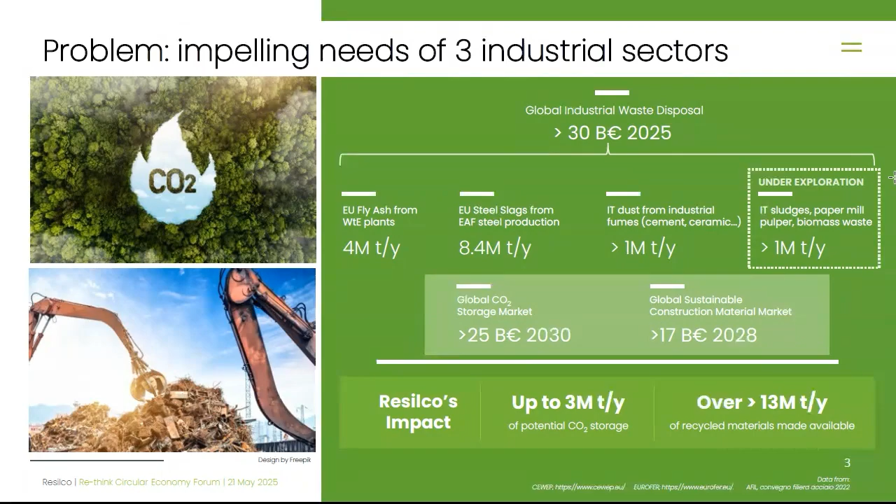How big is the problem? We are talking about a quite large problem, since there are several billions of euros spent on disposal costs for our industries. We have several billions on new construction materials, and then the CO2 market is involved as well. So it's a big market generating a lot of economic and environmental problems in Europe, but not only. So we are quite ambitious. We are working in Italy, but we are expanding to Europe, and the idea is to arrive at more than 2.3 or 3 million tons of CO2 storage per year.

What we offer is a solution. We found that we have to generate a new supply chain. As for everybody working in a circular economy, you have to create your own markets. It is difficult to introduce a new material. We are at the end of the life of the waste from these industries and at the beginning of the other industries. We transform the waste into a raw material. So you have to be in a place where nobody was before. This is an opportunity, but also a difficulty. And the permitting and all of the regulations are quite tough.

We work with the stainless steel industry, waste-to-energy plants, the ceramic industry, and the cement industry. We took the waste, treated it and tested it with the final users, the building sector and road sector. So everywhere you need calcium carbonate or derivatives, we can apply.

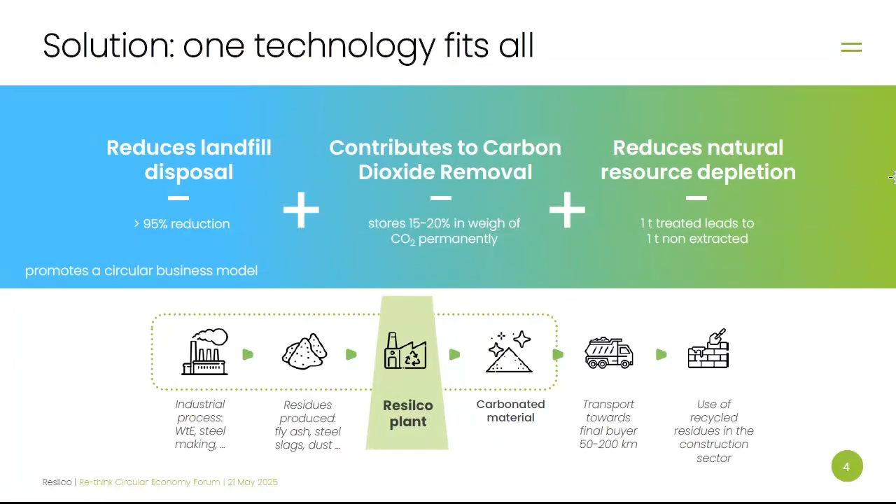What we do is quite simple. We do what happens in nature, but which takes hundreds or thousands of years. We carbonate the molecules that get carbonated in nature, but we do it in minutes. And we do it quite efficiently since we use mechanical forces, without high pressure or high temperature. So we are quite fast and efficient in making this carbonation.

The carbonation has different values. One is storing the CO2, because we can store it permanently inside the material. But we are also encapsulating the hazardous problem. Most of those materials are hazardous waste because they have heavy metals or elements that can harm the environment and humans. With the carbonates, we encapsulate all of this material in a shell, and this shell is stable up to at least 800 degrees. So we can pass all of the environmental controls and the material is safe to be used in construction.

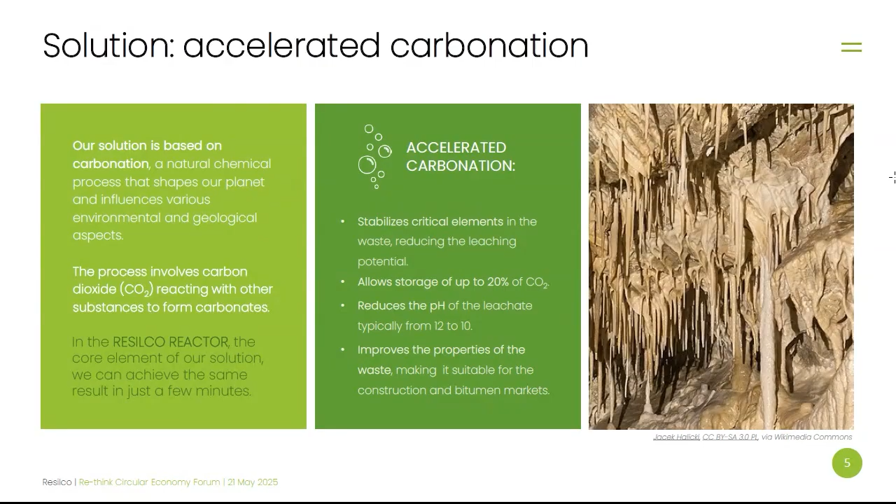Quite simple. We mix with water, we mix with CO2, we use our patented reactor, and in a few minutes we have a sludge containing the new material. We separate the water and the solid. The solid goes to concrete manufacturers, stone manufacturers, or any road manufacturer, for example.

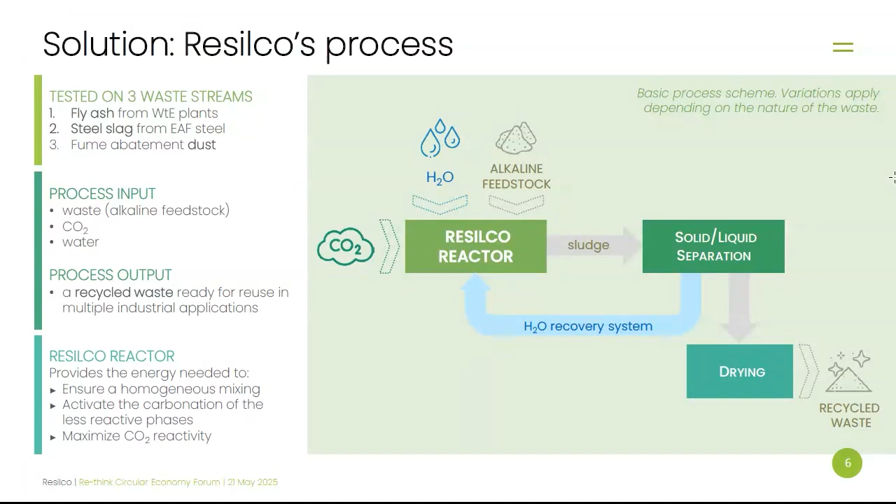And the water gets fully recovered, because we use a lot of water. So part of the 3 years of development was spent investing in how to recover the water to be more sustainable. So quite a young company, but with more than 5 patents, Italian and international. The material has been tested with the final users, universities, and has been validated.

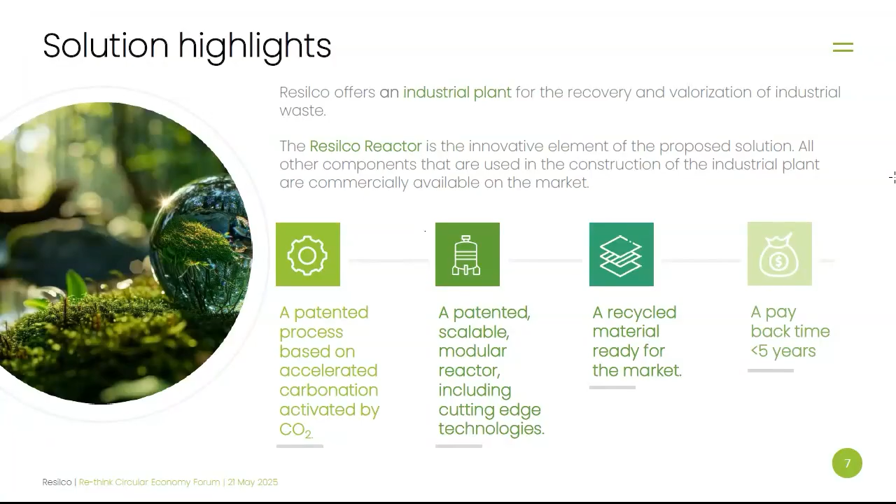As I said at the very beginning, environmental problems have to find a solution that is economically interesting for the company. So the return on investment for our plants is typically below 5 years. So it makes it interesting also for our customers.

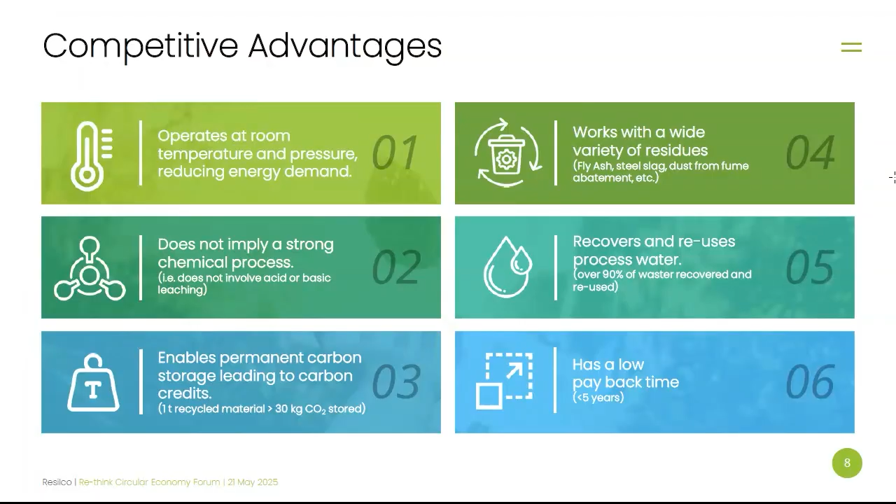We are not alone. We have companies in UK, we have companies in Switzerland making carbonation, but we are the only ones working at room temperature, room pressure. We don't use any other chemistry but the CO2. And we can use the very same reactor for a large variety of materials. So this makes you more comfortable with the market. We recover the water, and then we generate high quality carbon credits. So basically, you can also have some revenues from that.

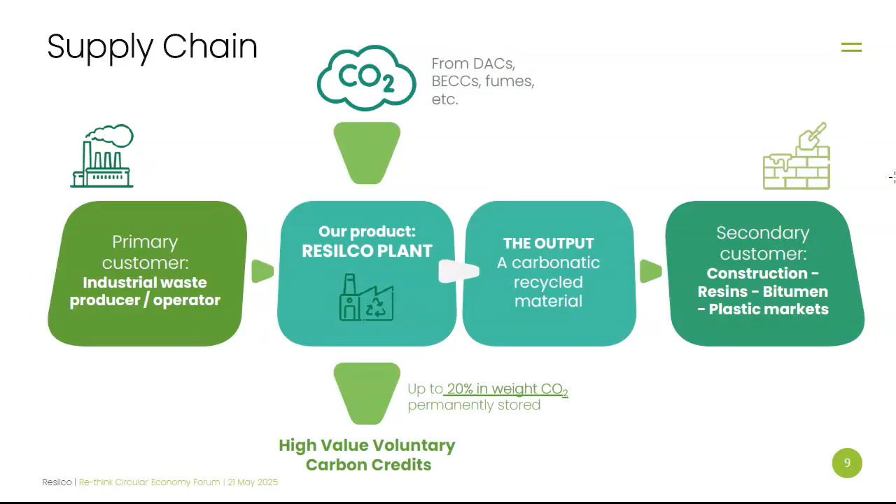So this is the supply chain we are creating for our customers. So we take the waste. We have partners delivering the CO2 from direct air capture, from biogenic sources, and then we sell the material at the end. And we take care of everything for our customers. So we sell the plant, but we also manage the plant for them, because most of our customers are not familiar with construction materials. So they are asking for a solution which is turnkey. So this is what we do.

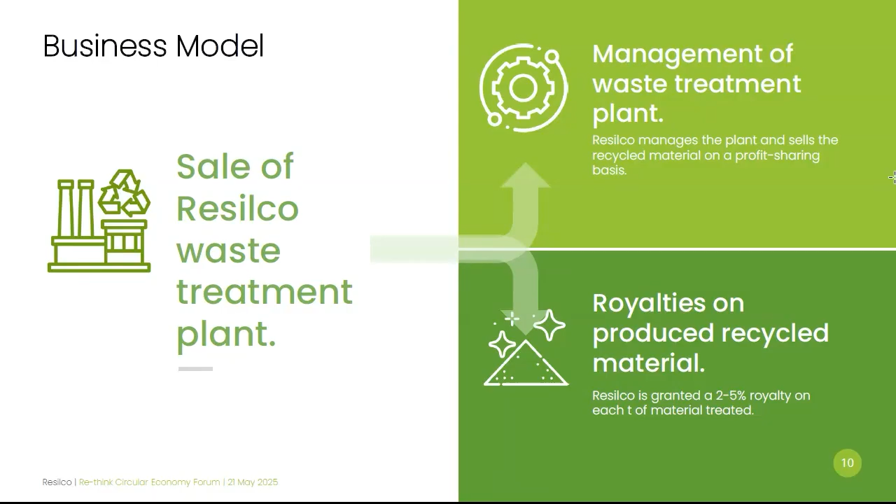And then, creating the supply chain, we govern the final market for our products, so we can maximize the value. Typically, we choose customers that are geographically close to the waste generator, so we don't have the impact of the transport, but also we are looking for the highest value we can obtain for them. So certain materials can be sold as a cement substitution, and this is the highest value we can have. Some others, like a pozzolanic. So we try to match the perfect material with the perfect value.

Not me, the team that works with me, but we are already working with 100% of the waste to energy plants in Italy. So from A2A, which is actually one of our partners and is a shareholder of the company, but we work also with more than 60% of the stainless steel manufacturers in Italy. We validate the material again with the final users, making concrete, making all of the different derivatives for the road industry or for the building industry.

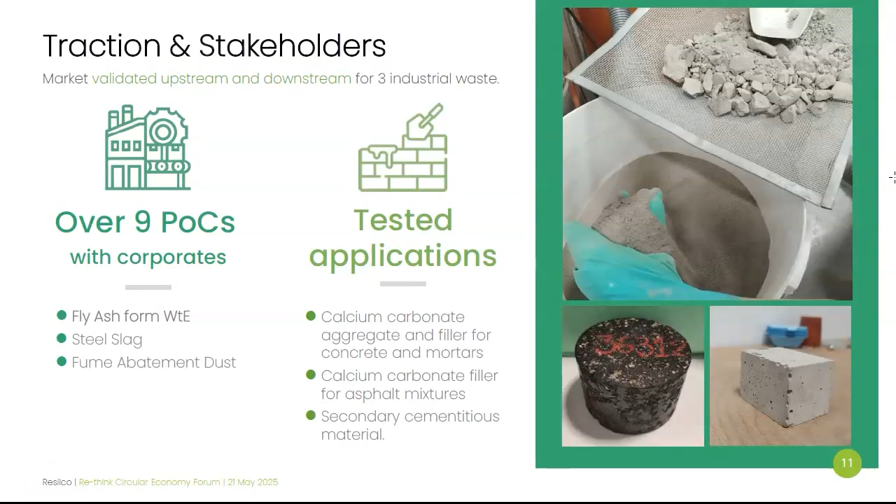Where we are now, we are validating the environmental permitting of the material and the environmental permitting of our plant. So we have a small laboratory plant capable of doing 500 tons per year, close to Milan. It's just 10 kilometers from here. And we are now doing the permitting for the first small industrial scale plant, up to 5,000 tons per year. Again, it's 5 kilometers away, and it will be operational by the end of the year.

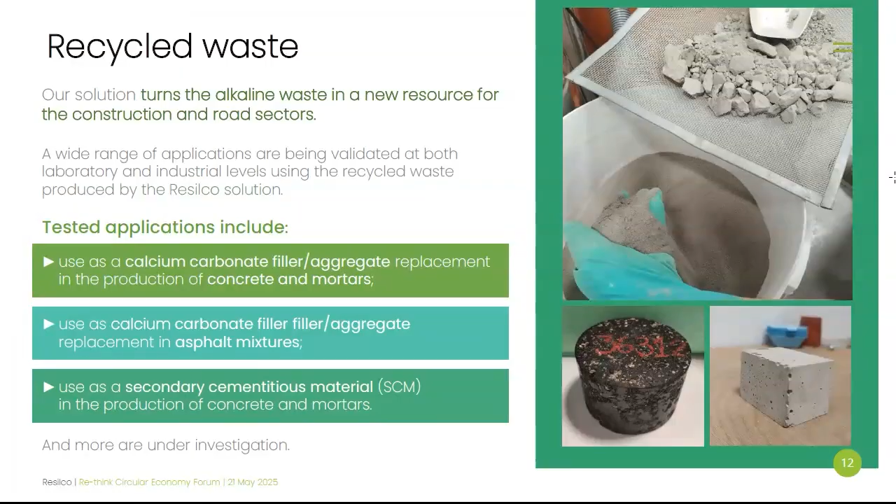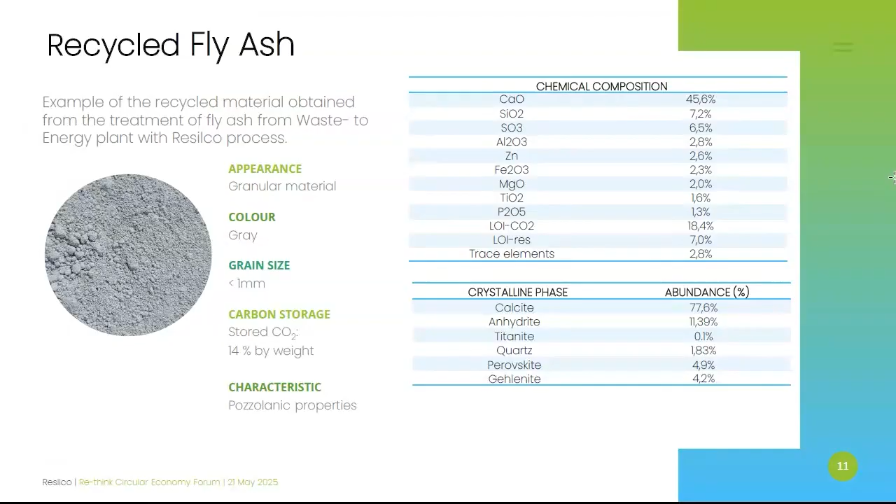The materials that we generate are quite different depending on the raw material. So this is the kind of material coming from the steel slags. This is quite similar to cement, has very similar properties, and is storing around 12-15% in weight of CO2. This is the material coming from waste to energy plants. So this is basically the incinerators, and this is a nice pozzolanic, so a material that has some good properties mixing with the cement.

And this is typical material coming from fumes, dust coming from fumes abatement from the ceramic industry. So we are talking about people making ceramic parts. We take the filters from the chimneys, and the dust which is coming is just generating this kind of material.

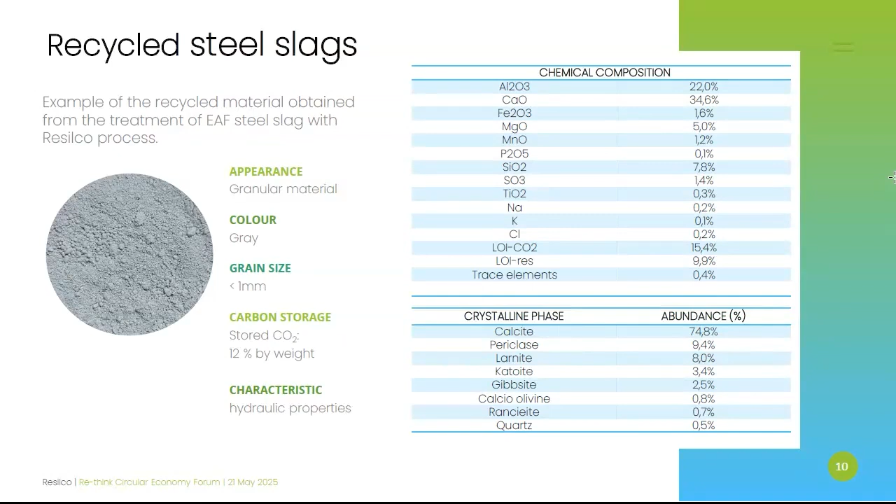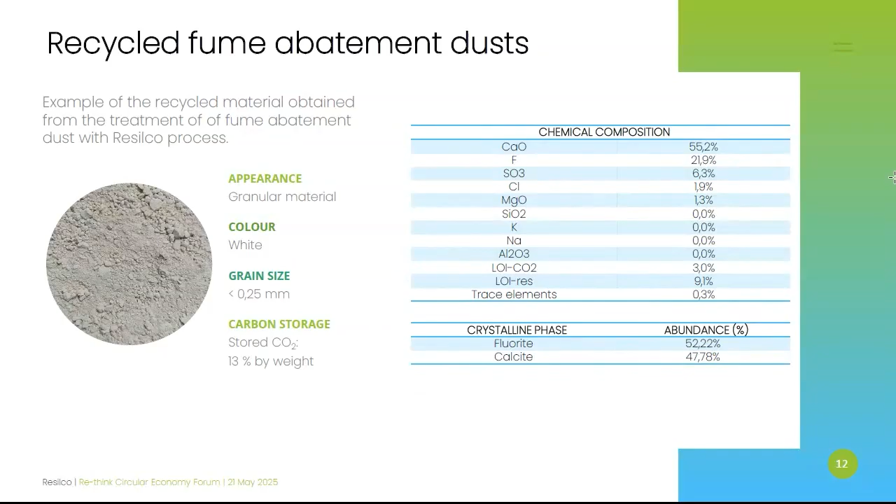All of the materials you have seen, the granulometry is quite small, which is adding a lot of value, because our process is not only introducing the CO2 and generating carbonate, but it's also milling the material. So typically our material is a very fine filler, and the values in the market are quite high, because the alternative is to take natural material and mill it. So you have a lot of cost and a lot of energy just dedicated.